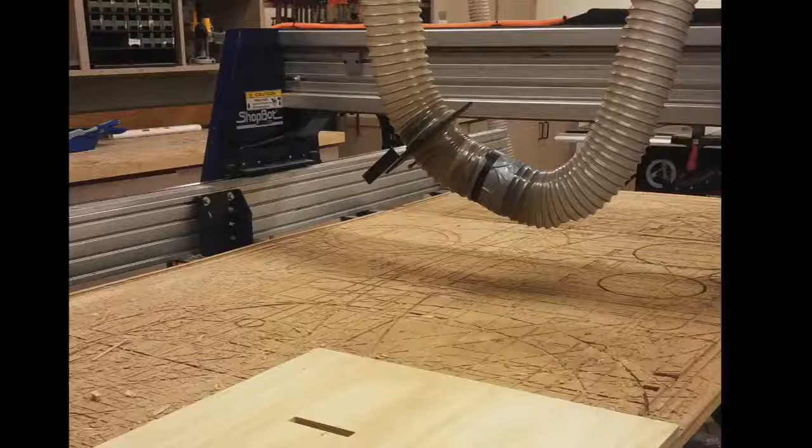Hey, I'm Ethan Bishop. Today I'm going to be showing you how to go from a completed VCarve file to ready to cut in the Shopbot. So here's my VCarve file.

Before we go to the flash drive and Shopbot computer, there's a couple of things we're going to check. Make sure all our dimensions are correct, thickness is correct. Normally I like to zero to the top of the material because the Shopbot bed's pretty beat up, so it gives a more accurate reading. Then over here, we're going to double click on this to check some material setup settings.

We're going to check the thickness, just zero again. We want the clearance above to be about 1 inch. You can put it as high as you want, this is just for fast travel. We don't want it to be too close to the wood for risk of hitting something. And we just want to make sure the home start position is something sane so it's not going to go crazy.

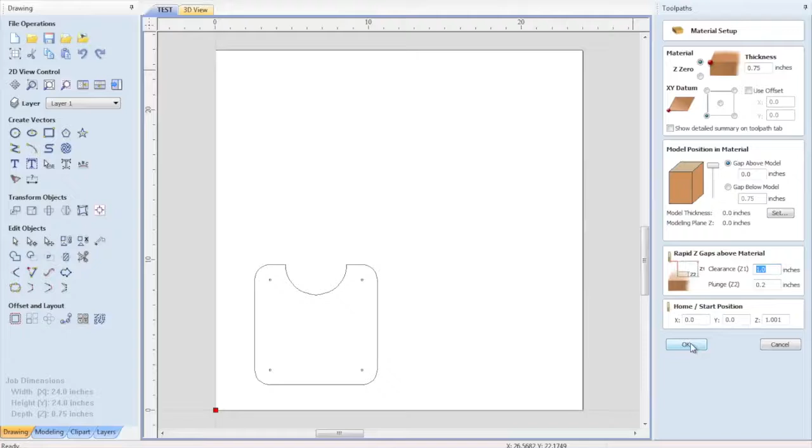And then we're going to go ahead and save our VCarve file. Save as. We're going to upload it to Drive real fast. I already have it in Drive, and then from Drive we can go back to the Windows side of our machine and download the file to the flash drive and transfer it over.

Okay, so once we move our file over, we're going to open it on the flash drive, double click, open in VCarve real fast. It's going to be the same thing as on the laptop.

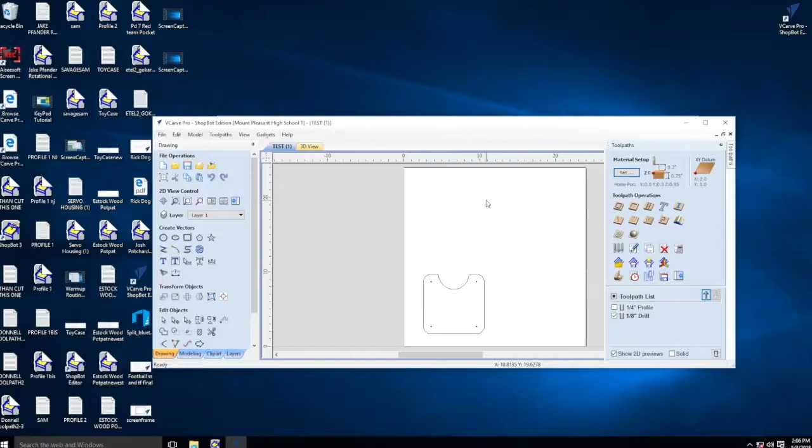From here, what we're going to do is secure our material down to the workbed. So my material here is 20 by 24, or 24 by 24. I'm going to place screws around the corners, far away from the material. I can use these little numbers down here to measure out for my screws. So I know after 1 foot this way, I'm clear to place a screw over, and after about a foot this way, I'm clear to place a screw wherever too. So we're going to go ahead and do that.

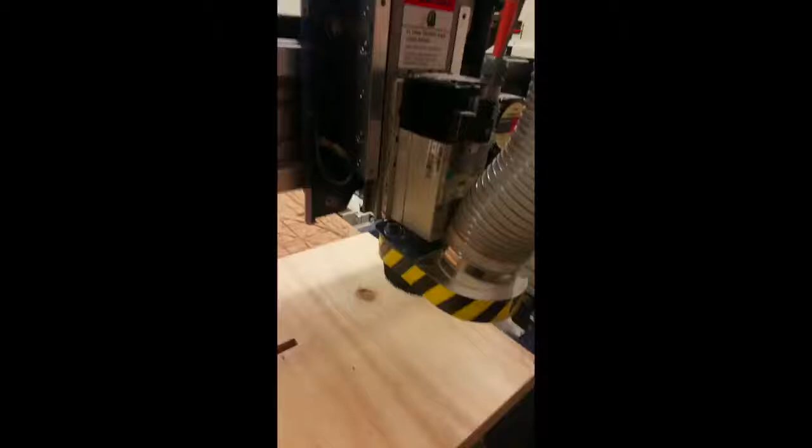After we screw down the material, we're going to go ahead and start to zero. As you can see here with the keyboard in this orientation, the arrow keys will move the different axes, left to right. Page up and down will move the Z up and down. So after we know how to move that, we can go ahead and zero to zero.

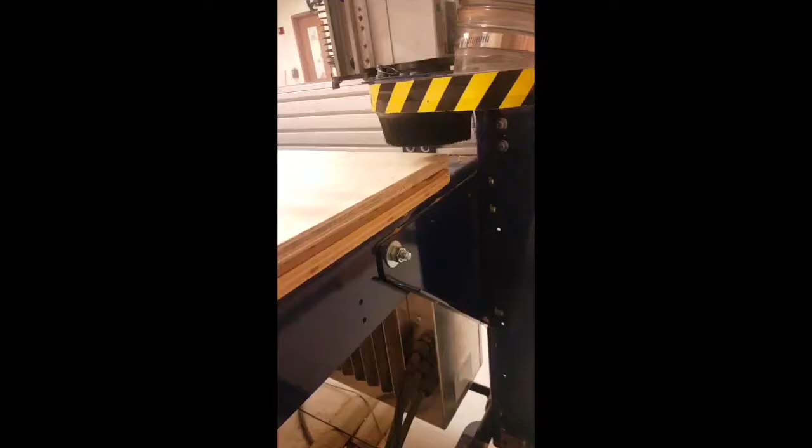We're going to lower it just above our workpiece. Then we're going to move the X and Y so it's right on the edge of the material. In the computer, we're going to determine this as a 0 point, so it's going to cut our piece in the right location. So let's go ahead and do that. See, right on the edge.

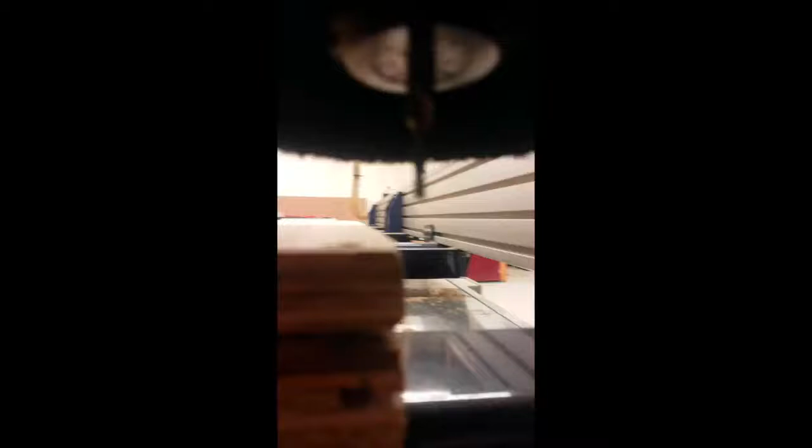So here we go to the yellow box. We're going to go ahead, as you can see here, as we move it around with the keyboard, you can see the values here moving. So once we have the X and Y in the location as we just showed before, we can click 0, X, Y, and we'll click 0. And that's going to tell the computer that this is a 0 location. And so then we can go ahead and close the yellow box.

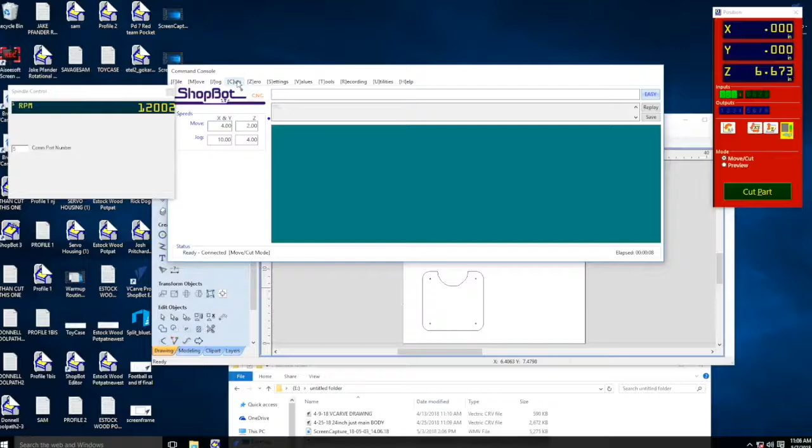Now we're ready to zero Z, which requires a different method. First we click Cuts, and we're going to use C2, which zeroes the Z axis with the zero plate. So click C2, then we have to go get out the zero plate.

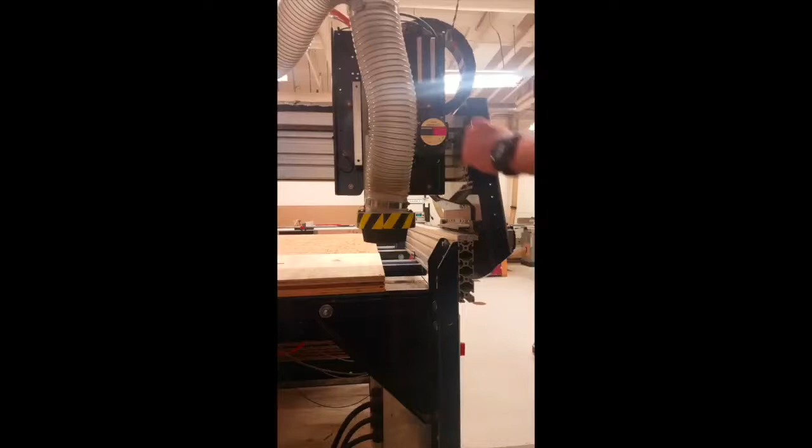It's going to tell us to get out the zero plate, so we go to the machine and take that out. There's a little clip too, plate and clip. We place the plate immediately under the bit, and put the clip onto the bit to make sure it won't fall off. Once that's in place, we go ahead and hit C2.

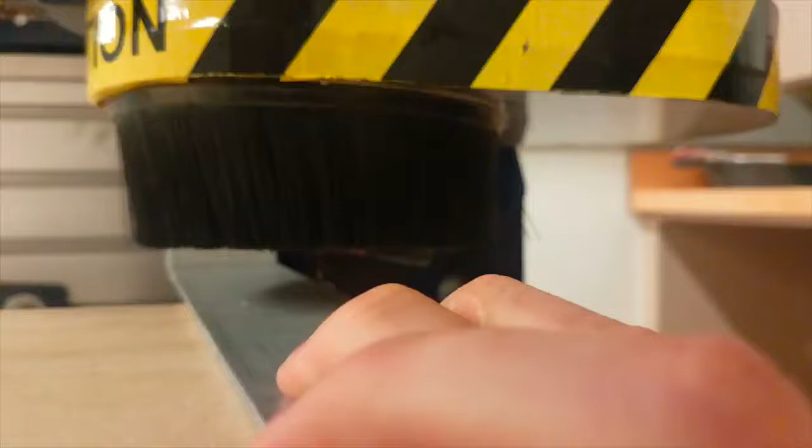We hit OK to run since we're over the zero plate. The machine lowers the bit, it hits the plate, goes up once, down again, and back up. We can go ahead and put away our stuff. After that, we start dust collection, and now we're ready to run the file.

Now since we have everything zeroed, X, Y, and Z are both zeroed, we're ready to send our toolpath out to the machine. First we want to close the yellow window, because if that's open it's going to mess it up and just not work, so we have to make sure it's closed first.

Since we have the 1/8 inch bit in the machine, I'm going to select the 1/8 inch bit, hit Save Toolpath, make sure output direct to the machine is checked, hit Save Toolpath file, save it randomly, hit Enter, Enter again. Then it's going to prompt us to turn on the spindle—you turn it on, hit OK, and the file will run your machine. I'm not actually going to run this today, so I'm just going to hit Cancel.

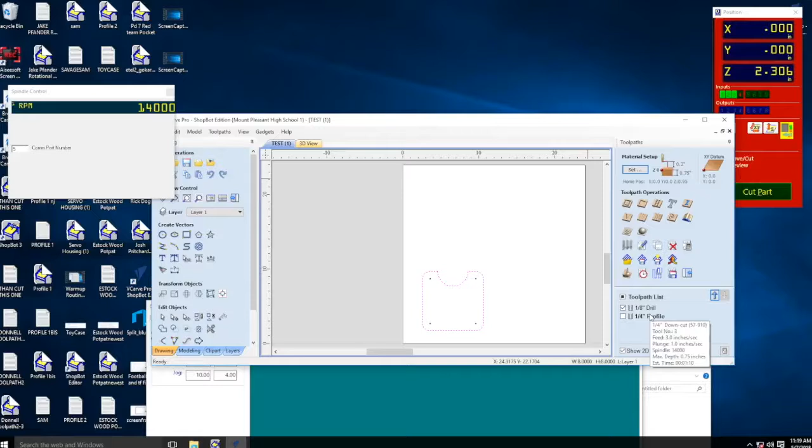After that, since my next toolpath requires a straight bit, a 1/4 inch straight bit, I'm going to have to change bits in the machine, so let's do that real fast.

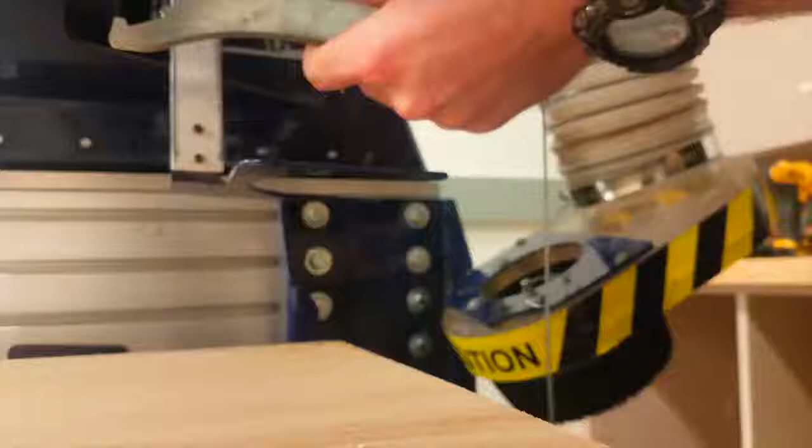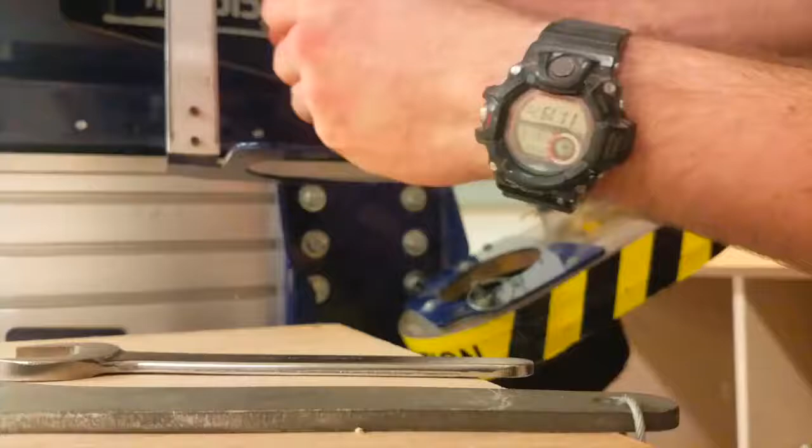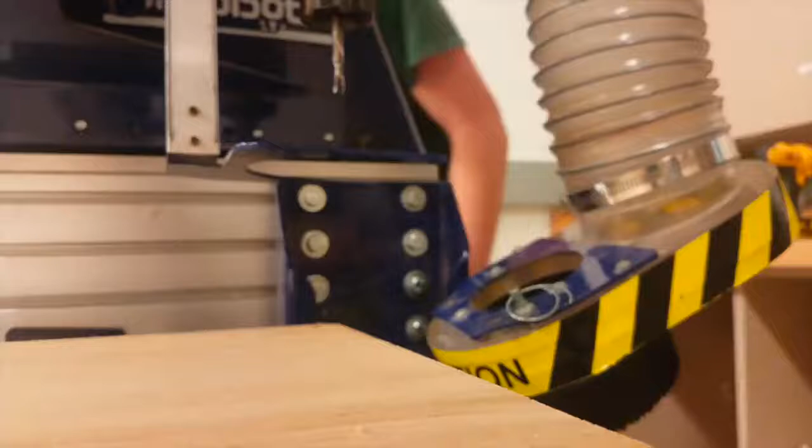Here's just a brief overview of how to change bits. First we get our spanner wrench, or our crescent wrench. For this, we have to remove the dust collection, which is a little complicated—we just loosen the knob, pull it down, pull the pin, pull it out. This is just a brief overview, so it won't tell you exactly what to do. From there, we put our spanner and crescent on and push them together to release the bit. We take out the different bit, put the new one in, and tighten it back up with the same wrenches. We have different collets for different bits, but I'm not going to get into that right now. Once we're done, we put our wrenches away and put the dust collection back on.

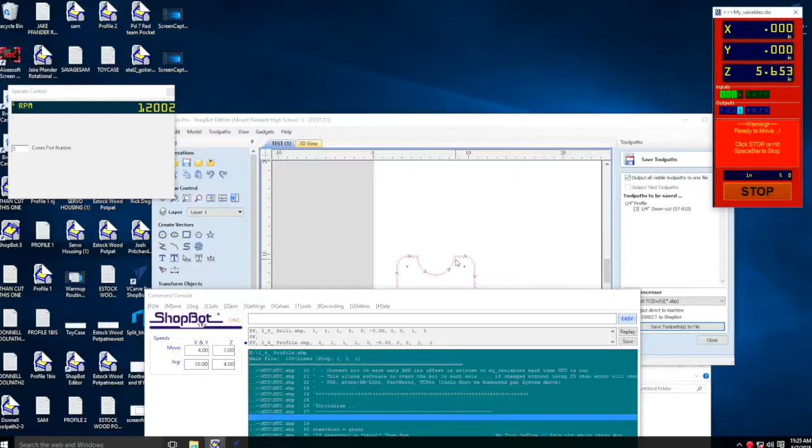Now since we've switched bits to the 1/4 inch bit, we're ready to run our second toolpath. First we close the yellow window again, open this up, and select just the 1/4 inch, making sure we deselect the 1/8 inch. Hit save, direct to the machine, Save Toolpath, Enter, Enter, Enter. Then it's going to prompt us to start the router, which we're not doing today, but you'd hit OK to start it up and run your file.

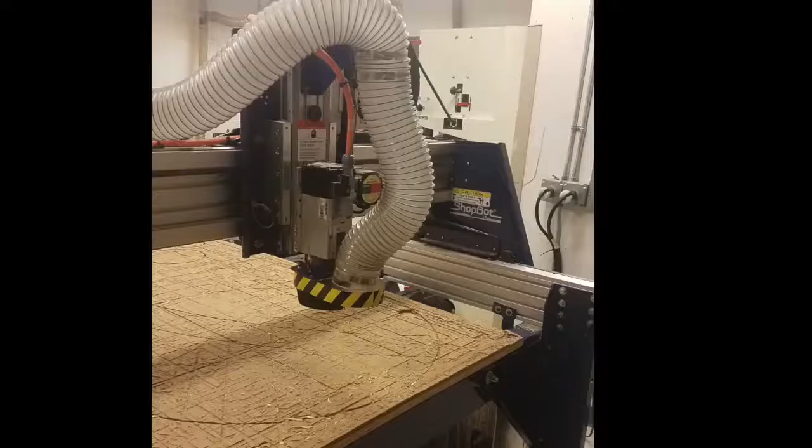In conclusion, I hope this video gives you a general overview of the ShopBot—what to do, what not to do—and hopefully makes you safer on the machine so as not to damage it. It's a very capable, strong machine, resilient to errors, but it's always good to have proper practice so we don't cause unnecessary damage to it.